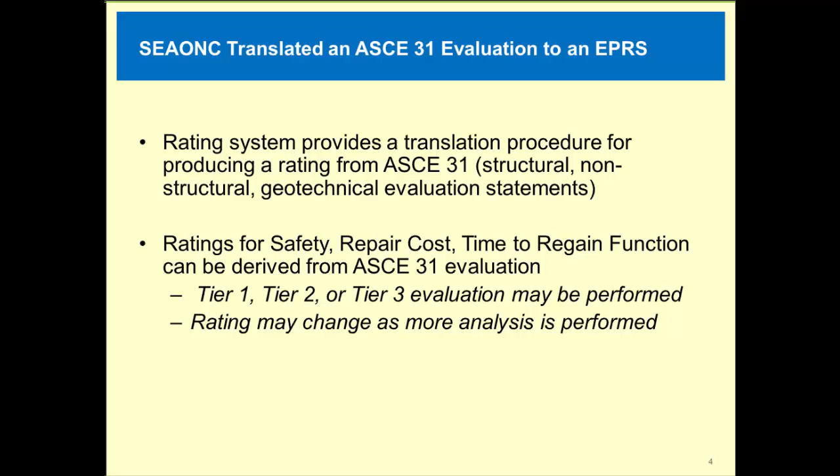So here's a mapping of ASCE 31 performance levels to the EPRS. So at its most basic, a building meeting these ASCE 31 performance levels will result in these EPRS star ratings. Note how an ASCE 31 life safety performance level correlates with a 3-star safety rating, and an immediate occupancy ASCE 31 performance level correlates with a 4-star safety rating. Also note the lower relative star ratings for repair. This is a result of the fact that ASCE 31 was primarily designed as a tool for assessing safety and does not address repair costs particularly well. Thus, the mapping to repair costs was intentionally conservative.

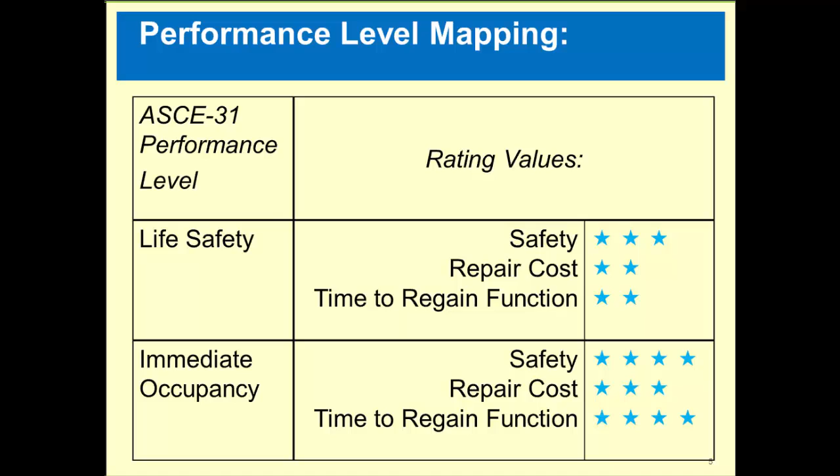The ASCE 31 safety mapping to the EPRS, though, is actually performed utilizing the individual ASCE 31 queries. Note the column showing the statements that need to be complied with to achieve a 4-star rating. The committee made collective judgments regarding the various statements, in general making the translation less conservative than it would otherwise have been. For instance, note that a complete load path is required in order to achieve a 2-star rating, but the masonry stress check need not be satisfied to achieve a 2-star rating, but would be necessary to achieve a 3-star rating.

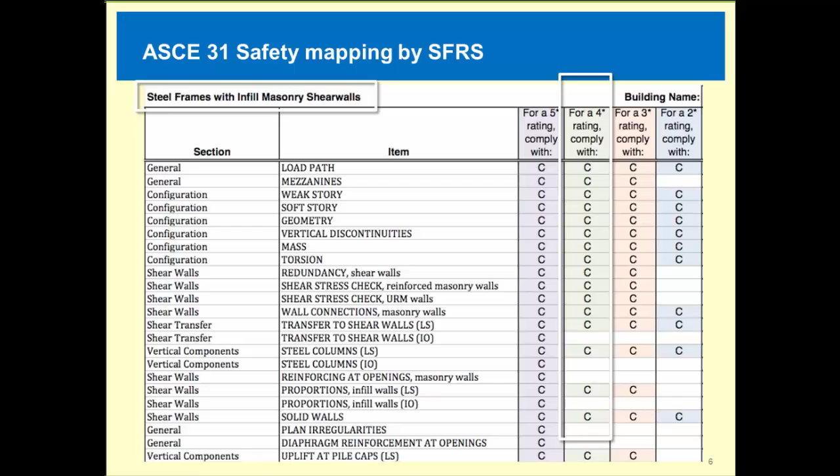So with respect to the hazard, the BRC was somewhat vague, considering that the hazard could range from the code level hazard to a 75% reduced hazard, such as utilized in ASCE 31. The USRC TAC decided to use an earthquake with a 475-year return period, 10% probability of exceedance in 50 years, as the hazard level for all 3 dimensions. The arguments for this choice were that the hazard was compatible with traditional design ground motions. This hazard level's also portable to regions not addressed in reference standards. This level of shaking is commonly established by independent government agencies, providing a more objective point of reference. A return period is a tangible quantity for users and eventually other hazards, and it is a hazard used for PML analyses.

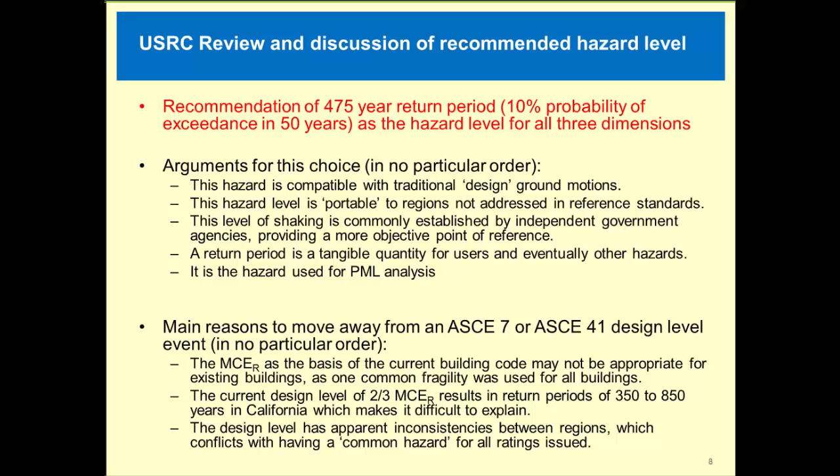So the SEAONC BRC, as noted, has the EPRS has 3 dimensions, and there was an emphasis on using clear, straightforward language. Each dimension has a short descriptor, a symbolic descriptor in terms of the stars, and a long descriptor. On this slide, you can see the symbolic descriptors and the short descriptors. They're intended to be succinct, jargon-free, and somewhat unambiguous, and the repair cost ones are tied to industry standards.

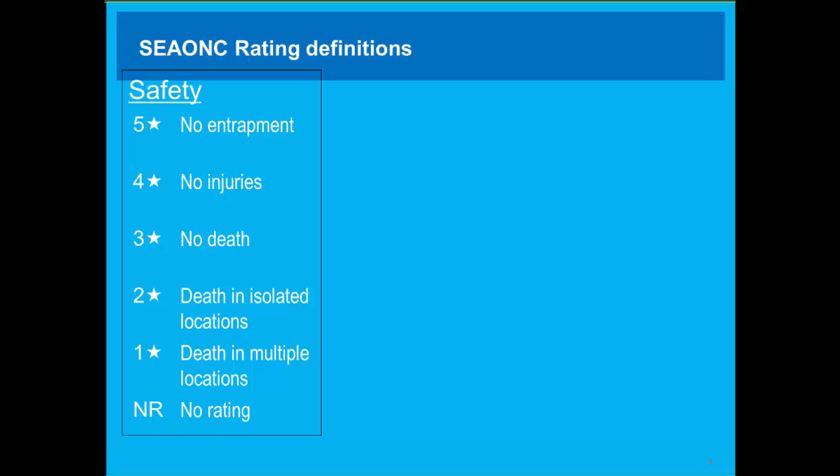So in the safety dimension, you can see the use of the terminology, no injuries, no death, and these in the repair cost are tied to the industry standards, and then the recovery, the simple within hours, within days, etc.

The USRC TAC Dimensions and Definitions Subcommittee did not like the use of the word death and wanted to make all the safety definitions somewhat vaguer, so you add likely to the short descriptors. With respect to the repair cost, they did not think there actually were industry standards tied to those various damage levels and elected to use qualitative terms. And the recovery times ended up being less precise.

The long descriptors changed also. These are the descriptors where the language is carefully couched and intended to be rigorous. The SEAONC BRC used the terminology known to be associated with, and this was changed to conditions unlikely, as you can see in the no entrapment. The SEAONC BRC did not find these changes, particularly in the safety dimension, to be an improvement, and identified some significant problems that would have affected the validity of the ASCE 31 translation matrix.

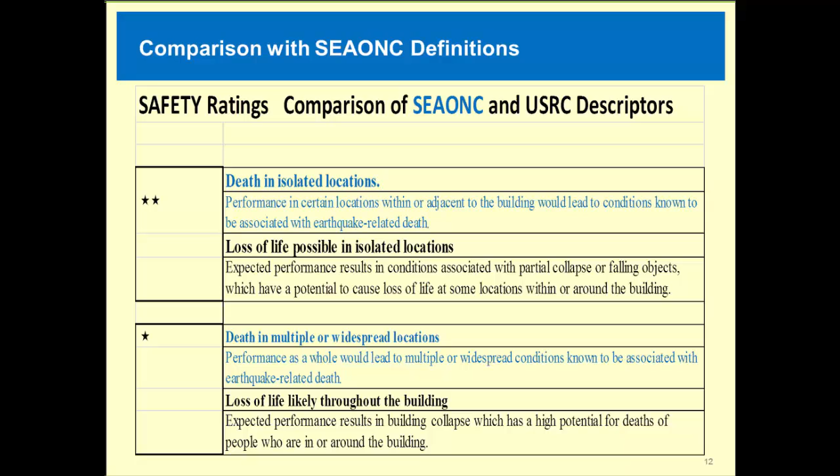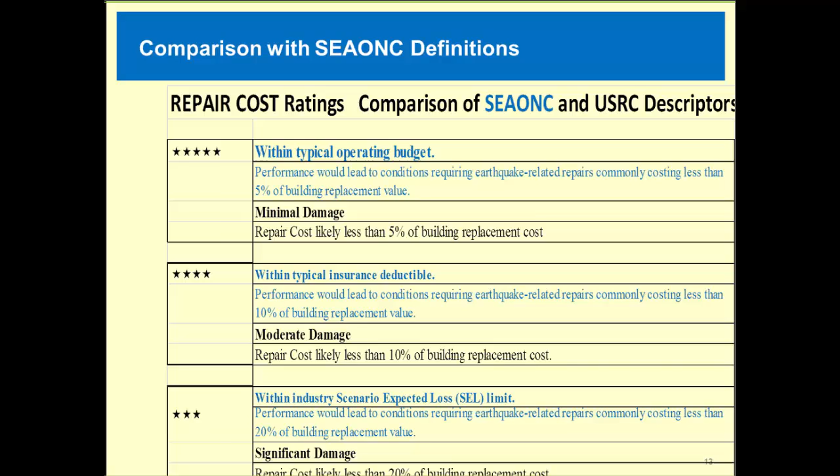In the repair cost dimension, the short descriptors changed to qualitative words, but the long descriptors remained very similar to what they were before. And in the recovery dimension, the BRC EPRS time ranges became somewhat broader and more vague when adopted by the USRC. Another important thing that the USRC added was specifically stating that external factors needed to be excluded in these recovery times.

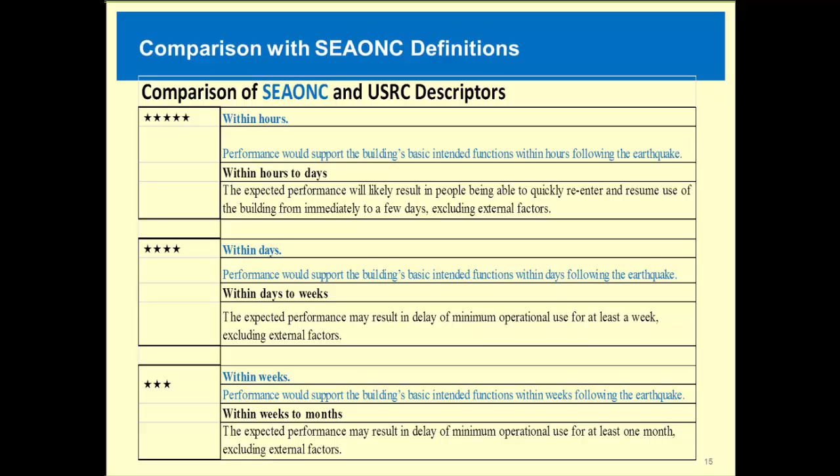So in conclusion, here are the findings of the ASCE 31 subcommittee that were passed on to the USRC Technical Advisory Committee. They recommended that the USRC utilize ASCE 31 translation methodology developed by the SEAONC Buildings Ratings Committee for the assignment of a seismic rating, particularly for the safety dimension. And they noted that the translations to the repair and recovery dimensions appear to be conservative for many applications. The one qualification is that buildings should not be benchmarked except through the ASCE 41 process, since the ASCE 31 benchmarking was deemed to be too broad.

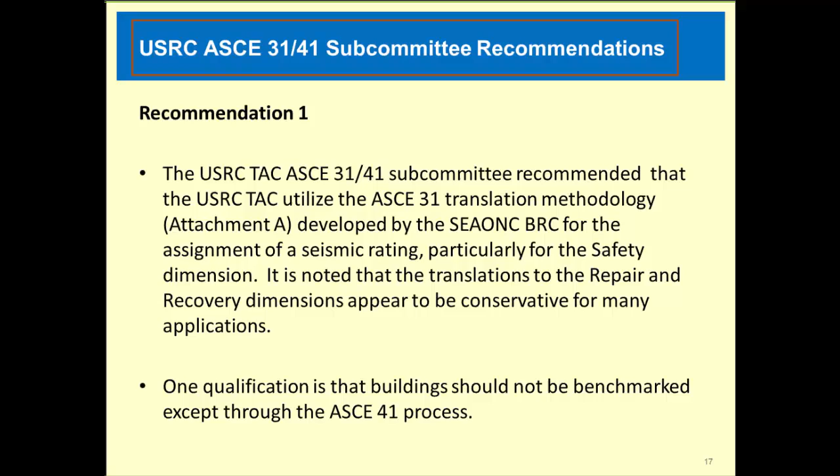And a follow-up version of the translation matrix that will include an update of the ASCE 31 checklist to the ASCE 41 checklist is expected to be completed soon by the SEAONC BRC. When ready, it will be reviewed by the subcommittee in the expectation that it will also be recommended for utilization. And in the interim, it is anticipated that the profession would use ASCE 41 and use judgment to map back to ASCE 31. Now Steve Bono will provide some more detail on utilizing the translation methodology.